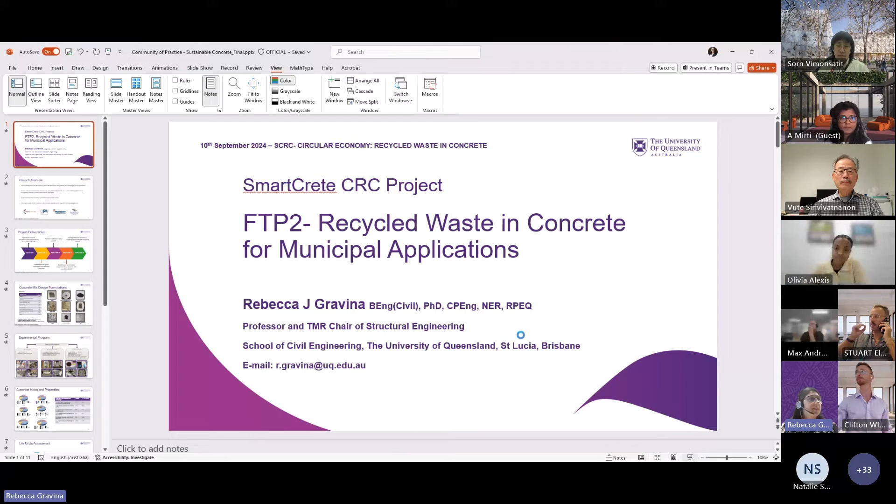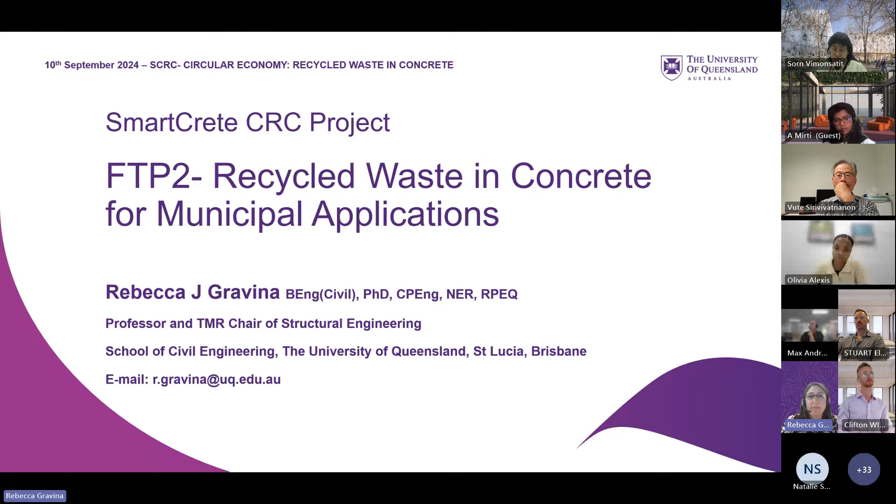What I'm going to present today, to set the scene for this discussion, is one of the SmartCrete CRC projects that I'm leading. This project is called Recycled Waste in Concrete for Municipal Applications. We're towards the end of this program, so I'm really pleased to be able to speak on this topic today. This project focuses on developing a Green Star rated ready-mix concrete for municipal pavement applications.

It has come about to address the need to reduce the use of virgin aggregates in concrete, and at the same time solve the problem of the increased amount of waste being generated in the industrial, commercial and domestic sectors, and redirect some of that waste from landfill to other uses. Concrete construction materials is an area where we can redirect some of that waste material, provided that it meets certain quality and performance requirements.

And really that project overview is looking at trying to develop a concrete that can reduce environmental emissions, using these recycled materials as an alternative to partial or total replacement of cementitious material and also natural aggregates.

Now, this project, as I said, is supported and funded by the SmartCrete CRC program, so I'm very fortunate to have had that research grant support from the CRC and also the following industrial partners. So we worked with the Office of Projects Victoria in this project to establish the CRC project profile, and later on we had partners from Hanson and Mornington Peninsula Shire join us.

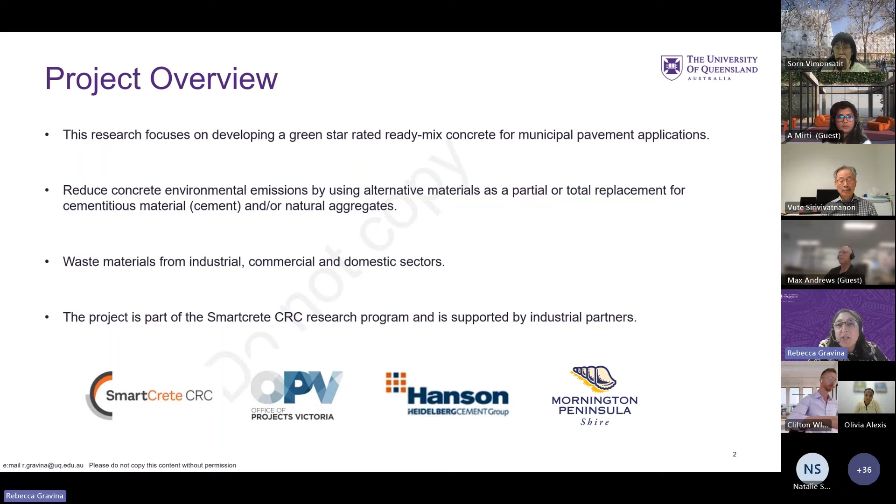So the project had several deliverables. Deliverables 1 to 3 have been completed. 4 and 5 are in their completion stages now. So we worked on developing optimised concrete mix formulations with different combinations of recycled materials, which I will talk about in a moment. Developed an experimental program that looked at the mechanical and durability properties of the concrete.

Then applied the work that we'd done in the lab to upscale the concrete mixes in a local concrete facility, and then applied that upscaled concrete mix design to a pavement trial in a local council. We're currently developing, based on this work, guidelines for performance requirements for concrete with recycled material content.

And we also have a PhD program that's coming to an end, where we're looking at investigating the continuous recycling of concrete with recycled content also. So not just one generation, looking at how we can regenerate the concrete mixes that we've developed.

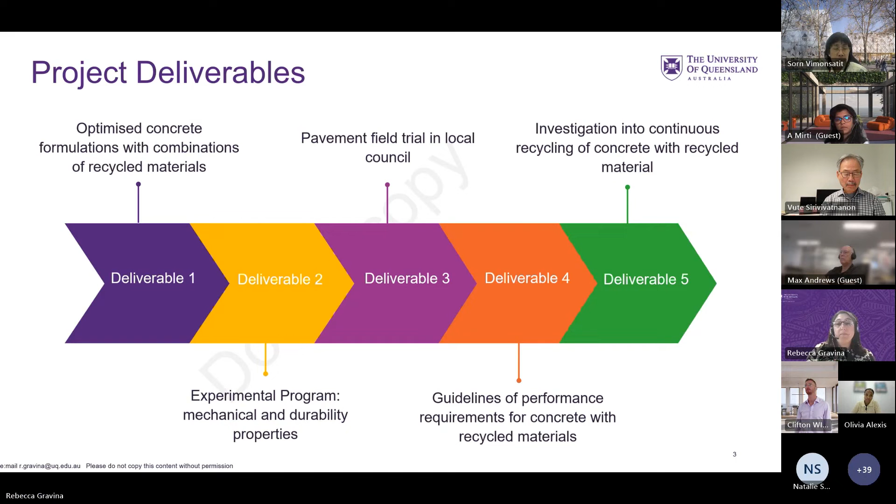So the concrete mix formulations and the materials that we've looked at consist of normal ordinary Portland cement. We've also incorporated ground granulated blast furnace slag, natural sand, natural coarse aggregates, and also looked at recycled crumb rubber and manufactured sand, as well as plastics that have been shredded and also ground, so polyethylene terephthalate PET plastics and also HDPE plastic.

You can see here a little bit about the different specific gravities of the materials, and when it comes to the recycled crumb rubber and PET plastics, we're dealing with material that's quite less in density than our typical aggregates, which will have a play in what sort of impact we have with these mix designs going forward.

The mix designs that we've developed look at a Portland cement to SCM content ratio of about 50 to 50, which is quite good, and the Portland cement content is 184 kilograms per metre cubed, and so we've been able to actually achieve a concrete mix design as per the Green Star 3 rating. And our natural fine aggregate replacement is at a 60 to 40 ratio.

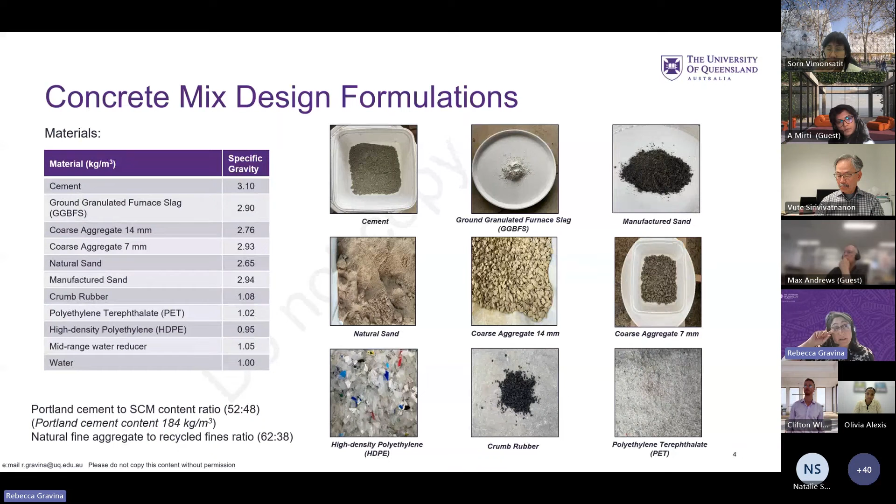So the experimental program looked at the fresh properties, mechanical properties and durability properties. We tested our concrete mixes over a period from day of casting to 365 days. So we've got data for all the mechanical properties over a 1 year period, which is quite good.

The durability studies are quite lacking in this area. So to be able to capture the strength development as well as the mechanical properties as well as the durability properties in terms of shrinkage, creep and other durability characteristics has been a really good outcome from this project.

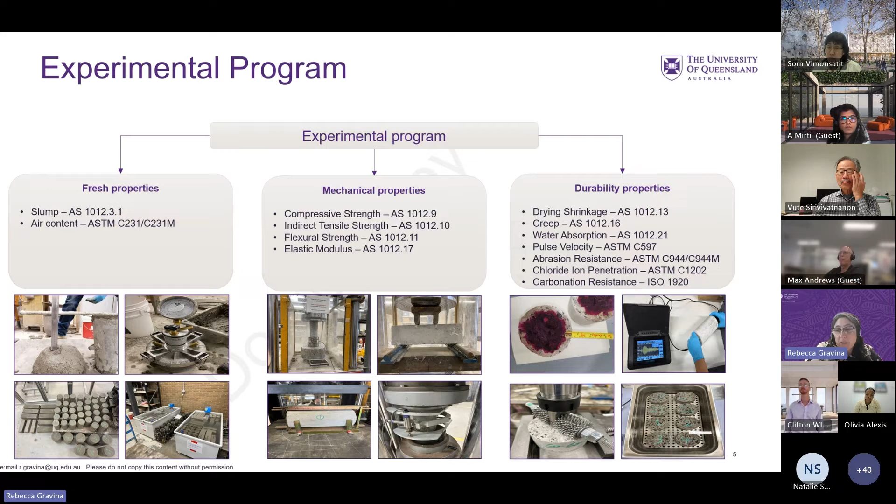The concrete mixes that we developed varied. We started with our control mix that had our 50 to 50% Portland cement to SCM ratio, and then we worked with replacing the fine aggregate with either just crumb rubber or just PET plastic fines. Or looking at a combination of PET plastic fines with crumb rubber, or also replacing some of the coarse with HDPE plastic, or a combination of the 3 different types of materials, PET, crumb rubber and HDPE.

So it's well known that as we replace the natural aggregates with recycled material content, in particular crumb rubber and PET plastic, we do get a reduction in the mechanical performance. So we do get a reduction in the compressive strengths and the modulus of elasticity, the flexural and tensile strengths, and the durability properties do get affected as well.

But the important thing is to what extent do they get reduced, and if those mechanical and durability properties are still within acceptable limits, and do they still allow this type of concrete mix designs to be used and applied in the field. So I haven't got time to present all the results, so it's just a snippet of some of the results that have been achieved.

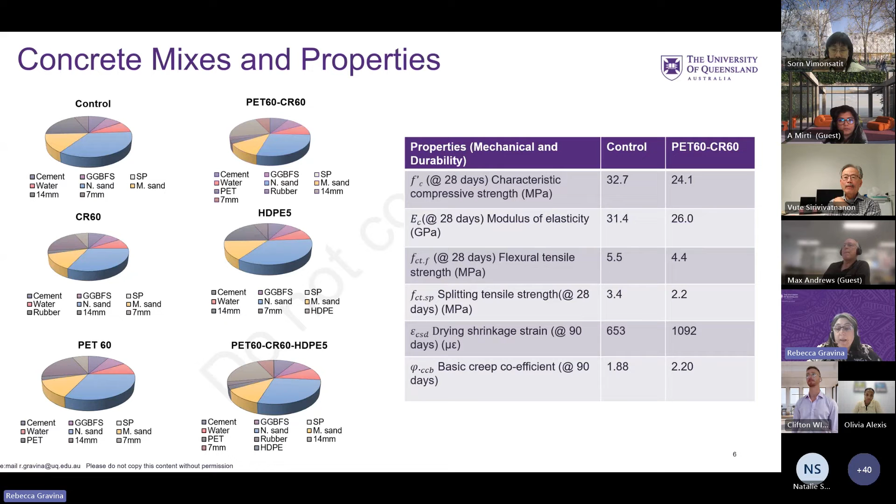Outside of the parameters, obviously, we haven't done a cradle to grave analysis, but that's part of the next process as well, to see what impact that has in terms of our CO2 emissions. What we find is that by adding some of this recycled content into our mix designs, we're not jeopardising too much the CO2 emission from the control mix.

We're not getting a reduction, and I don't think we will necessarily get a great reduction in CO2 emissions by replacing natural aggregates with recycled aggregates, because there's still a process that needs to be undertaken to process the material. Whether it's shredding or washing and sorting, that does create an emission there.

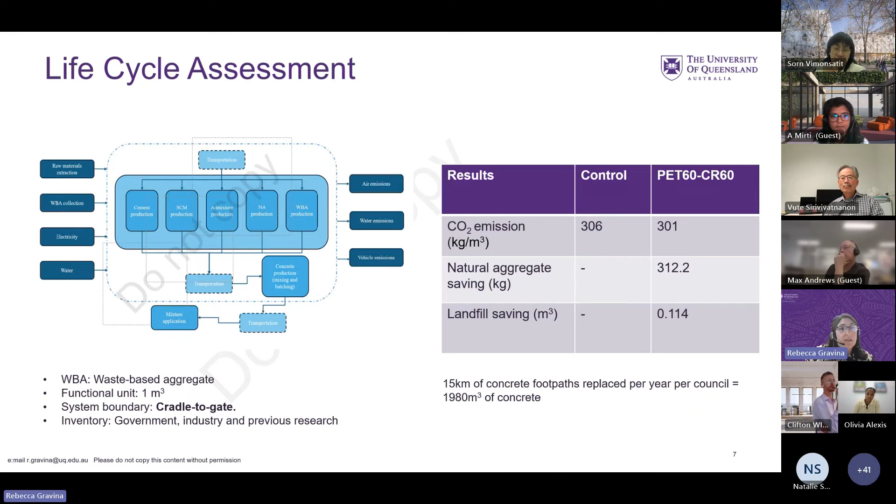Having done the LCA model, we chose the concrete mix design that has a combination of PET plastic and crumb rubber combined to replace our natural aggregate. So we've got a 40% replacement of the natural aggregate within the concrete mix design. We worked with Hanson, the local council, Mornington Peninsula Shire, and DM Roads to identify a site and carry out our field trial.

You can see here the two sites for the different types of mixes, our control mix plus the mix with the recycled material content, the crumb rubber and the PET, and also the properties of the concrete that was supplied on the day in terms of the compressive strength, flexural tensile strength, drying shrinkage, and the slump.

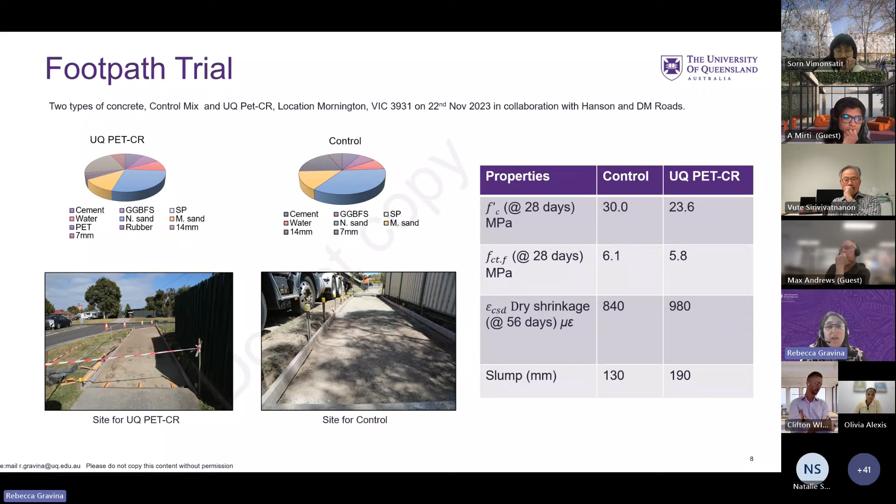It was a really good experience in terms of being able to work with the contractors and for them to get a feel of the material and what it looked like, and the responses were quite positive in terms of how they were able to deal with the material, because there was quite a bit of slag in this mix. It did look different and feel different, so it's not the type of concrete mix that most footpaths are constructed with, but the contractors were able to cast and finish the concrete and apply a screed for the footpath, so we're quite happy with that outcome.

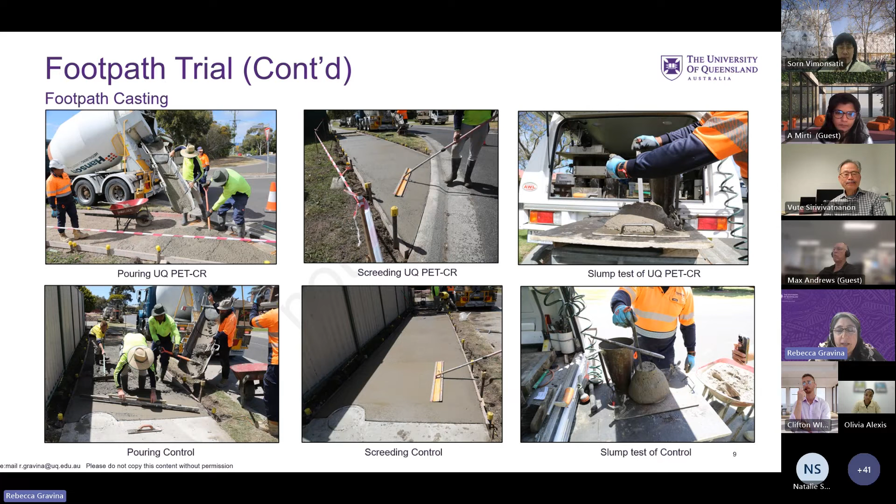These sorts of trials, and I know they're happening all over the place, are really important because they give the contractors and the people handling the material an idea of what to expect and how to get the finished product that is required. So that was a pretty good, successful outcome.

We also went back and inspected the footpath over a period of time, and you can see here the UQ PET crumb rubber mix design with the control slab as well, where we've got quite a good finished outcome. The concrete is performing. There aren't any visible cracks or anything like that you would expect, so we're pretty happy with how that trial has gone.

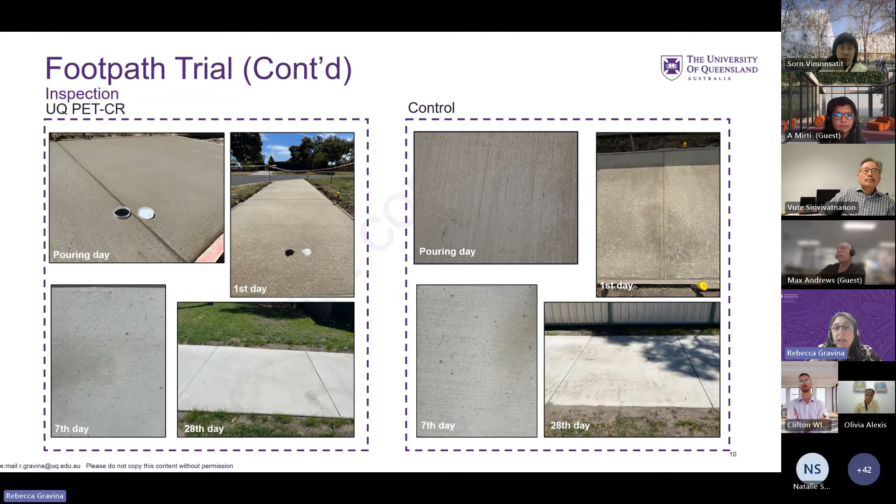So that was a quick snapshot of this project, and once all the results are finalised, they will be published and made more freely available. These are my contact details, and hopefully this has provided enough information, or set the scene for our next presenter to present on some of the other aspects that we've brought up in this presentation.

Have I stopped sharing the screen there? I can't see if I have. Yep, that's perfect. Thank you very much.

Rebecca, really interesting, and I think it was really good that you touched on the plastic properties of this material, this mix design, because that's always going to be the concern: if we start changing mixes, how will that look?

Specifically because we've been looking at concrete and producing concrete in a certain way for many years. So changing that, you really do have to start changing the perception when it comes to handling this material.

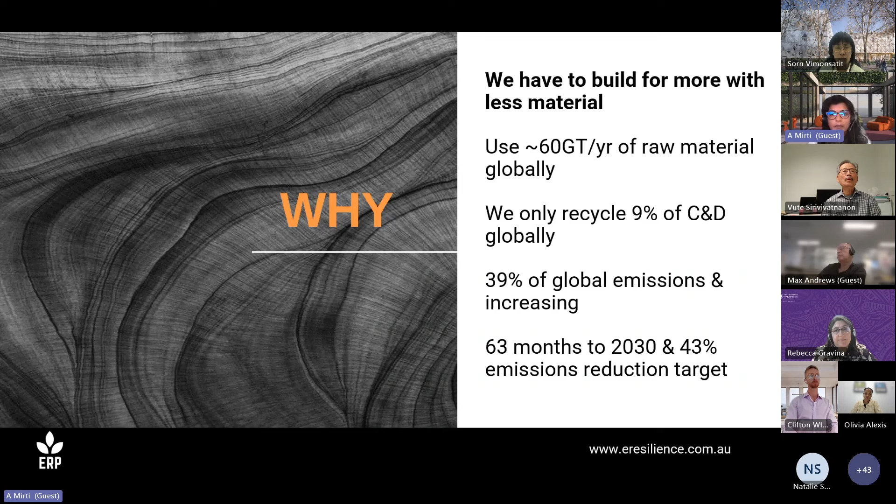So what is circular design? I'm going to refer back to Professor Jacqueline Cramer's work, which you're probably all aware of, and reiterate the 10 R's. The first one, prevent raw material use. You've heard of all the rest of it, but what are we doing to actually prevent raw material use? We are consuming 1.75 planetary boundary resources as we speak.

And our consumption is, of course, related to our increasing population. But in the construction sector, the demand for residential housing predominantly is huge. And so whilst there is a massive shortage of supply of material, there is also this never-ending growing demand for natural resources or raw materials for construction. So the question is, what does that mean in terms of reducing or preventing the use of raw material? Do we need massive built form?

I have a mortgage broker friend. She keeps telling me that every day she approves minimum, her average is $2.8 million of home loans, and people are investing in massive footprint houses. Do we really need these type of houses anymore? What does our future actually look like? Affordability for housing is seriously a problem in Australia.

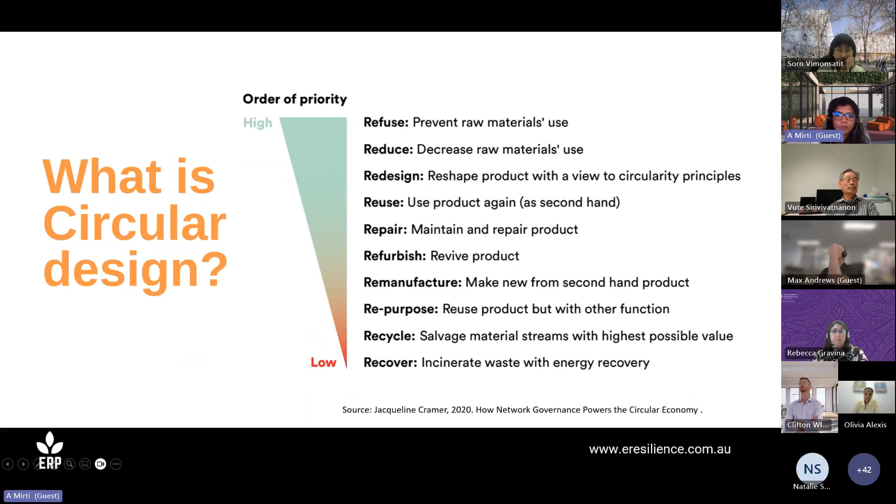So really rethinking what we as individual buyers, homeowners, what we are building, what we're investing in, and what does circular design look like? So at Beca, which I've just recently finished from, we developed this framework, a circular design framework. The purpose of doing this framework: as you would probably be familiar, circularity through the Ellen MacArthur Foundation focused on three key perspectives, around material recyclability and material use.

But at Beca, we extended that thinking and included the whole climate resilience, adaptation aspects and mitigation component to decarbonize future infrastructure. We brought in the cultural perspective because a lot of the time the values that culturally inspired design brings are quite significant in reducing carbon footprint, as well as the design aspect and obviously the socioeconomic benefit of it. So we used this framework to,

I'll let the person mute,

inform all the projects, so over 20, 30 projects that I've delivered in this very short period of time using this framework. The key purpose was to bring in that systems lens, the holistic approach to planning, and asking the right question at the right time of the project. So at the beginning of most projects, my role was to really look at the design aspect. What is the design? Where are the opportunities to bring sustainability and circularity into it? And who do we need to talk to?

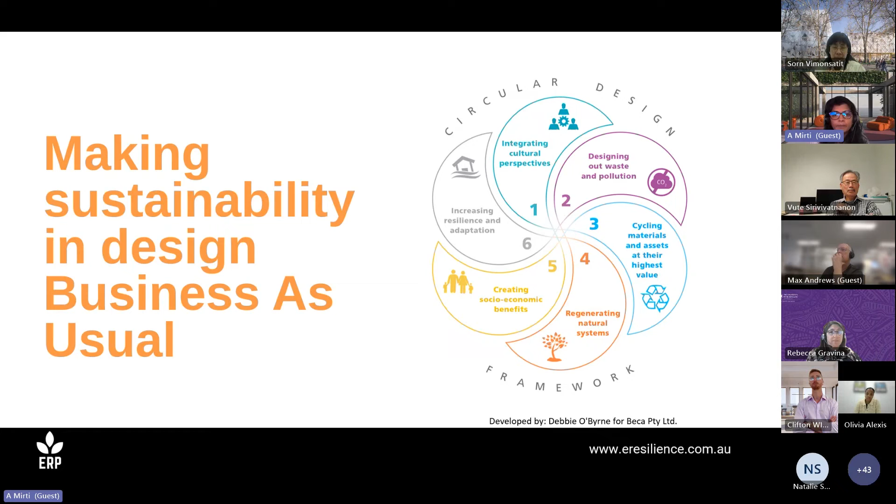So from an industry perspective, as you know, there are collective industry initiatives with MECLA. A number of you are probably part of MECLA. There's been so many different things happening under that umbrella. I'm part of the Cement working group. So we've launched new standards. There are new local government guidelines for low carbon concrete, and that's been trialled at the local government scale. At Lake Macquarie Council in 2019-2020, we were the first to trial road base using a high percentage of recycled aggregate material.

So there are a lot of initiatives happening, which is a great sign of that shift, and that the industry is being part of the solution. Industry is coming together in partnership. Following that in 2019, we had a number of trials with the New South Wales government to increase the fly ash across the Hunter region. I speak of the Hunter region because I've been quite active in that space. We have trialled a number, so Newcastle City Council, now also Maitland Council. There's been a number of trials for pavements, and great to see, Rebecca, that initiative you're developing. The other aspect was for the water infrastructure.

And so I would like to talk about one of the projects that I delivered, and really one of my career highlights, I suppose, was the partnership, the collaboration between the client, which was Transport for New South Wales, Beca as the designer, and Boral as the supply chain, the provider of the material. We looked at a New South Wales bridge, and we modelled the bridge to understand where the high carbon footprints were. It was based on the original design, because with bridges you have to build according to the spec. We did not have the opportunity to play with that spec.

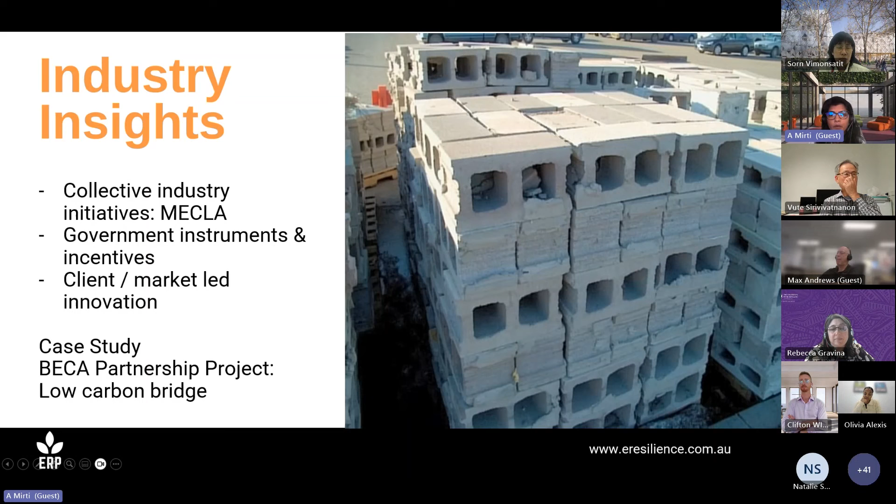So there's a lot of shift happening, no doubt, but there's a lot more needed. And hence the reason why research groups, CRCs such as these, are critical in bringing the right key stakeholders together to actually fuel this ongoing innovation and market-led approaches. I just want to wrap up with where to. The key thing is it's about collaboration, not competition anymore. We all need to bring our heads together to innovate, create, build that capability in the system. And where it works, scale it, scale the understanding and knowledge.

For instance, the project we did with the New South Wales bridge project, the learning from that has now gone to other parts of the industry, and it's been taken up by other players. And it's refreshing to see that we're no longer trying to compete with each other, but we're trying to share the insights we're building. Capacity building is a key component, and as a university, Macquarie, I know, is really pushing that. University of New South Wales as well.

Getting the graduates prepared: when I recruit graduate students into the role, what they have learned is a lot different to what they actually practically apply. So bringing them up to speed, upskilling not just the existing staff, but also the young graduate programs and training. Industry needs to provide partnerships with universities to really provide that active learning opportunity, and bring the different skill sets, because it's not just about one lens of thinking. It's about the multidisciplinary approach to really innovate.